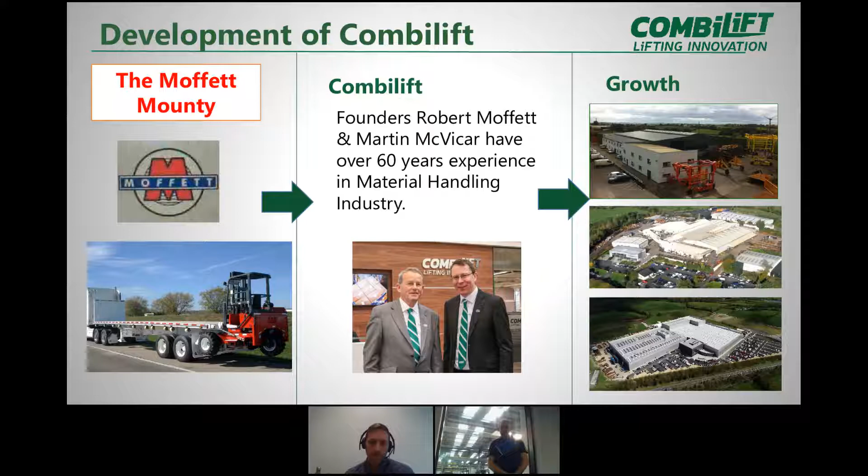So we're a worldwide business - I say we started in 1998. Employees, I said 650 there, but it's probably closer to that with a lot of growth this year especially, so we're probably up to about 800 employees now. In terms of turnover, we're exporting to a large number of countries - probably around 80 to 90 countries - and 98% of what we manufacture here is exported. Unfortunately Ireland only accounts for a small amount of business, so it's very much an international-based business. There's a huge investment into R&D - about 7% of turnover goes back into R&D, because we're manufacturing such a large range of products and always trying to update them and come up with new ideas. Maybe Anthony, if you want to show the first video.

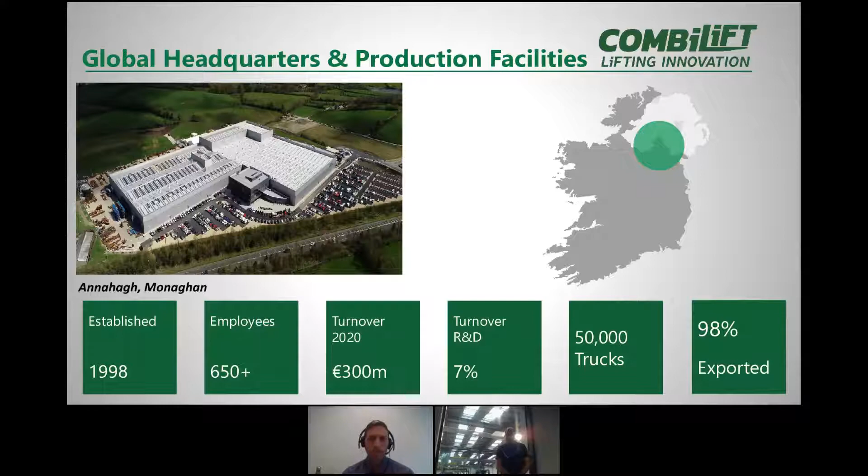Sorry, probably a bit delayed coming back there. So from that video, you'll be able to see some of the production process through the factory - right from the weld, through the paint, the assembly, and then the final testing of the products. As I said earlier, we're exporting to over 85 markets, probably closer to 90 markets now around the world - right from Russia to China to parts of Africa. So it really is a global business.

One other aspect of the business is the innovation within the business, which Combilift has been renowned for over the years. You can see some of the awards we have won. A lot of them came from within the material handling industry, just for the innovation in the new products which we design and manufacture here in Ireland and export around the world.

We manufacture a very big range of products. It's not just forklifts, it's a complete material handling portfolio, right from the very smallest machine, a pedestrian walk-behind designed for lifting 850 kilos, right up to the straddle carriers we manufacture here, which can handle 100 tons and over.

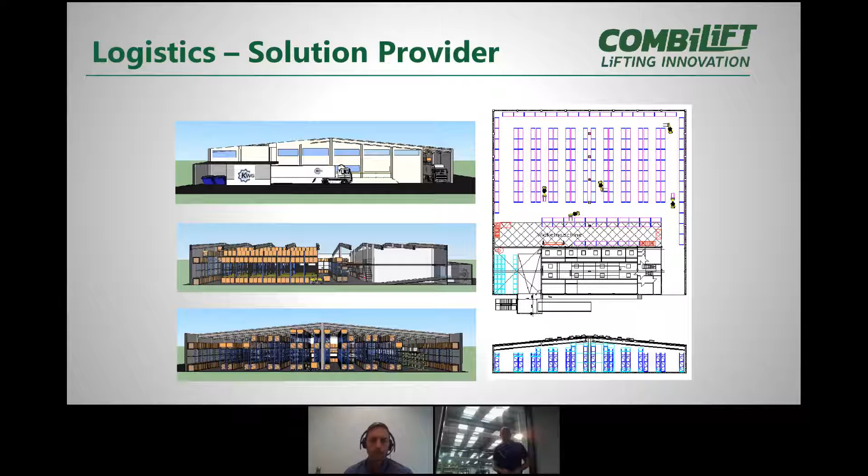We'll skip on, so I'll hand you over to Pauric Foy here now, and he's going to talk through some of the projects that he has worked on.

So I graduated in DKIT back in 2018, and I started working here in Combilift straight away after. I worked on a few projects in that time, but this is just one that we've done in the last 12 months or so, so I put a few slides together.

On the left-hand side there, that's our standard 4-directional C3000 truck, a 3-ton capacity 4-directional machine. We had a customer that actually had a couple of these trucks, but they wanted the same thing, only they wanted a side loader style truck, so the same sort of specification, but with a side loading cab.

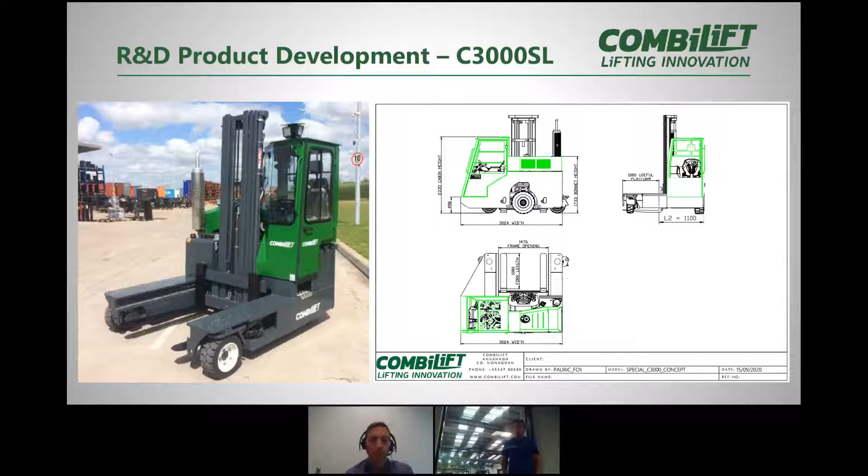You see on the right-hand side a layout drawing that we prepared for that machine. During the layout part of the process, we do a 2D drawing, which is much quicker than going into a detailed design. We can take that to the customer and say, is this sort of what you're thinking? And we can change some of the dimensions and specs until it's something we're all happy with. Let's see in the next slide.

So when we get something we're happy with, we go into the detailed design stage. That was drawn up using SolidWorks, so we're able to put everything together and see everything in 3D, how it's all going to fit together and work.

We try and use the standard parts as much as we can. The actual running gear, the engine, all the hydraulic components, the mast, everything like that is the same as a standard C3000. The only real difference is the cab and the panels, so that machine to service and work on is much the same as our standard C3000 truck. We'll go on to the next slide.

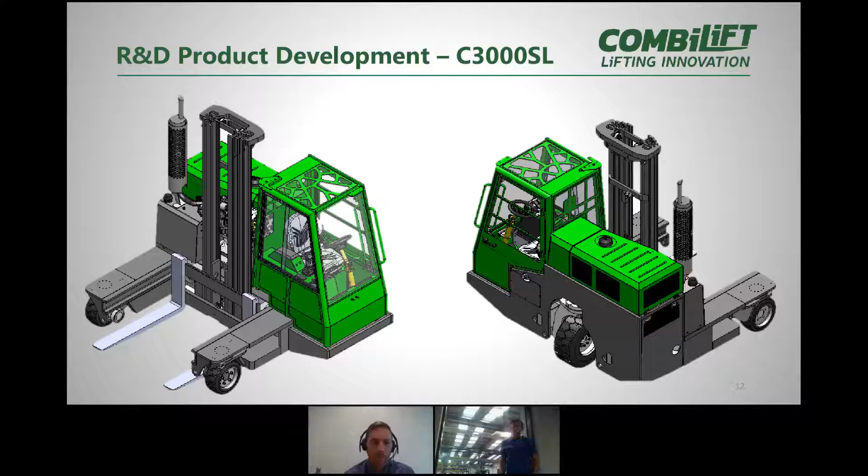As part of the engineering process, as a design engineer, we follow the project right through from welding right through to manufacture on the line here. On the left-hand side there, the machine just as the chassis was welded, and we fitted the cab on at that stage just to make sure everything was going to be okay, because it was an R&D project. On the right-hand picture, we have the machine actually on the line in production. So I would have followed that machine right through from weld through to production.

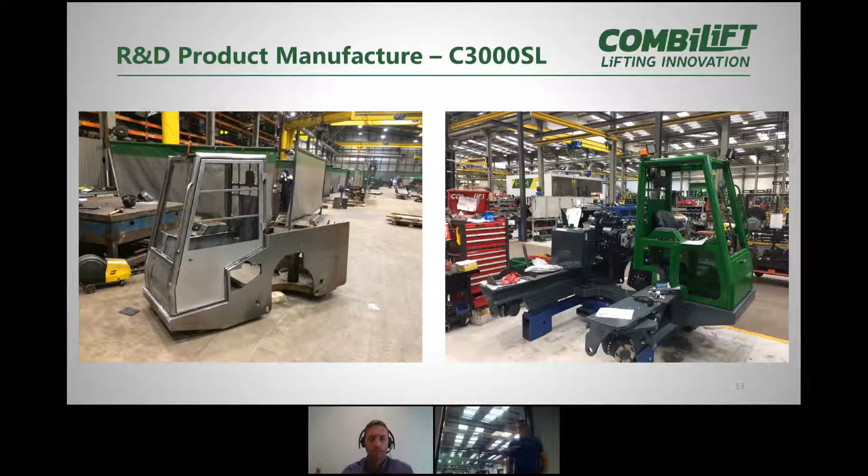So just the last slide on that project. That's the machine actually as it was built when complete. You see the photo on the left-hand side, the machine with a 3-ton weight on, so it would test the machine at maximum capacity, just to make sure everything was going to be okay. Every machine that leaves here does get a rigorous test before it leaves. Then we have a couple of photos on the right-hand side of the finished truck with the decals and all on, ready for the container.

So I'm going to hand it over to David Hatchett here, one of our control systems engineers, and he's going to talk through a few slides on that.

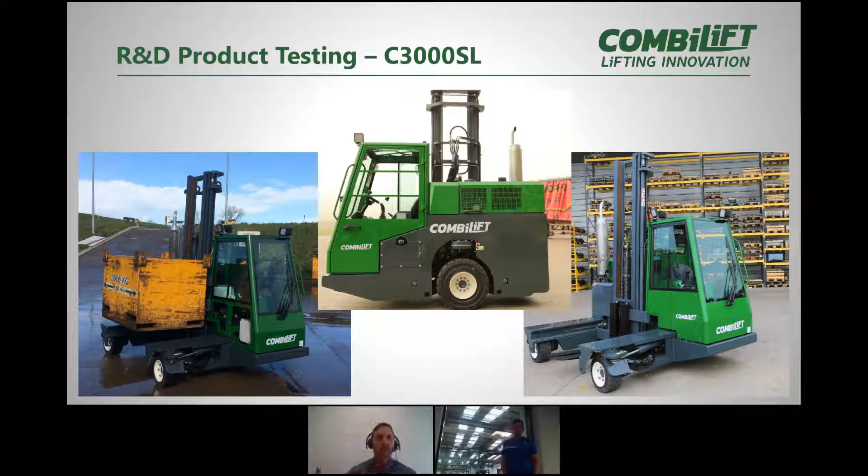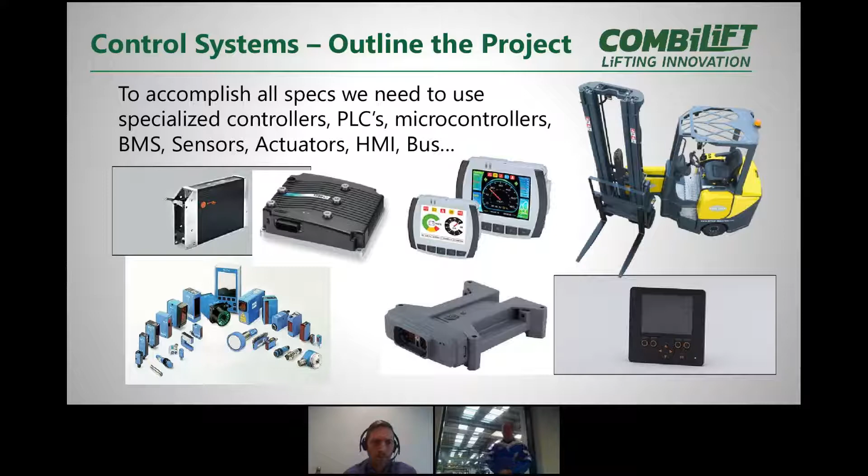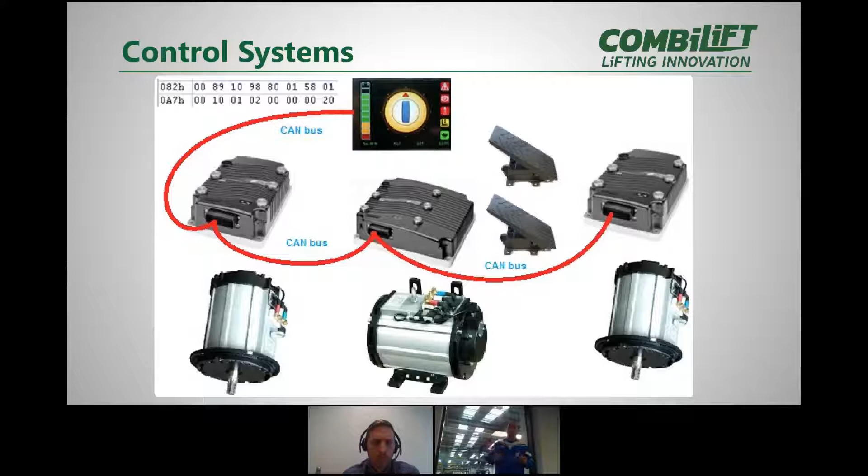Based on that, we would have all our components on our truck, and to have all them components, we'd have a nervous system. That'd be our CAN bus, to communicate with each component, so that every component can talk to each other and find out what unit or what motor was at, what part, what temperatures, and relay that all to the operator.

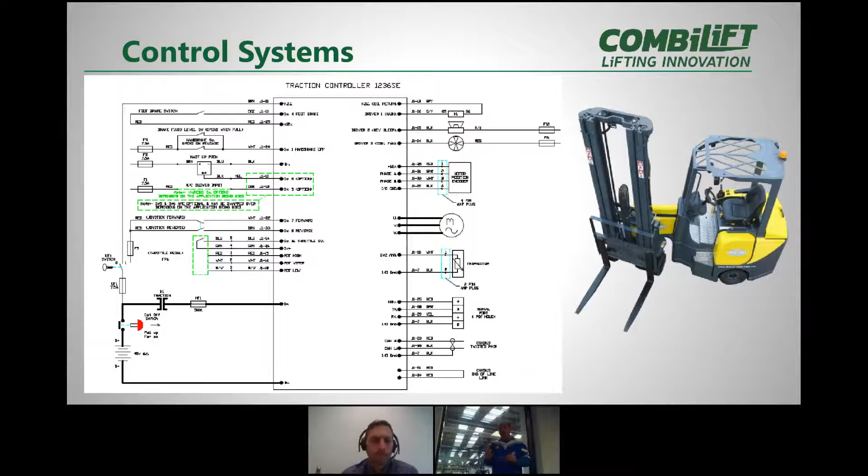Then what we do is we liaise with the electrical department and create a loom based on the outputs and inputs from them components that we're putting onto the truck, based on the functionality of the truck. So it's not just all hardware in the control systems department, we have software as well. We use many software packages to code and build in functionality in the truck.

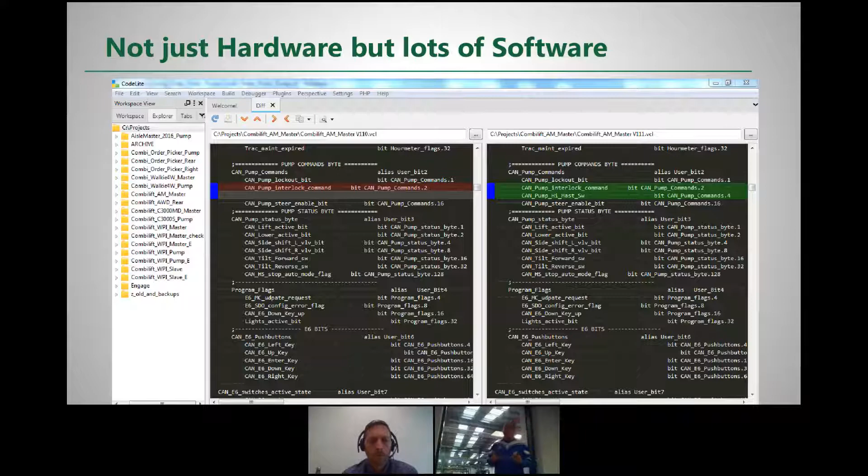So then that functionality, we can build in adjustments, parameters, and settings that the operator or the dealer can use to control speeds. That'll be another user interface that we build into the truck.

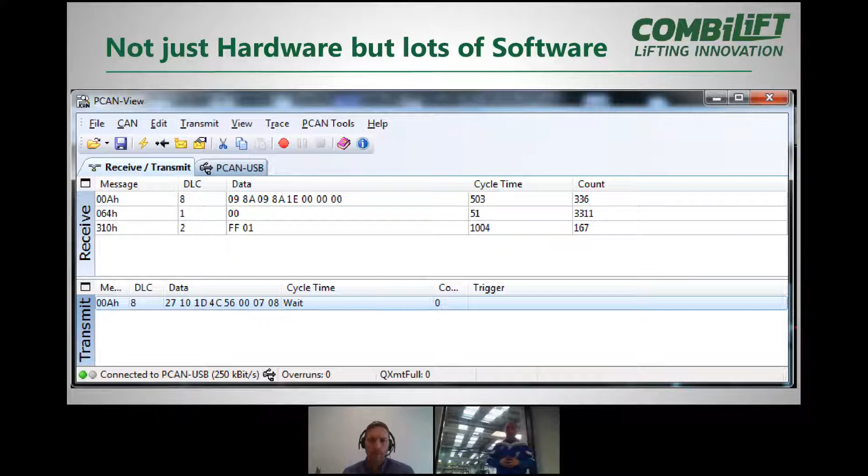Your career opportunities here would be to use this software to do advanced troubleshooting, like the oscilloscope, using the oscilloscope software, using the CAN bus software, as I said in the last slide. So that's why we need students to come on board.

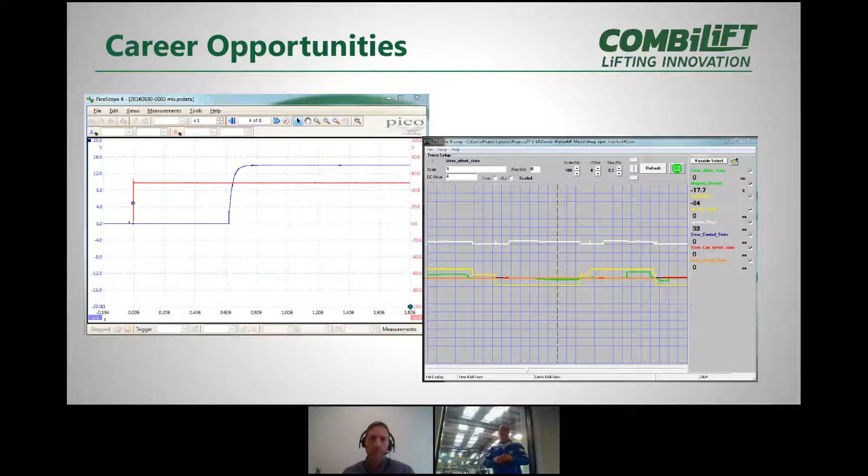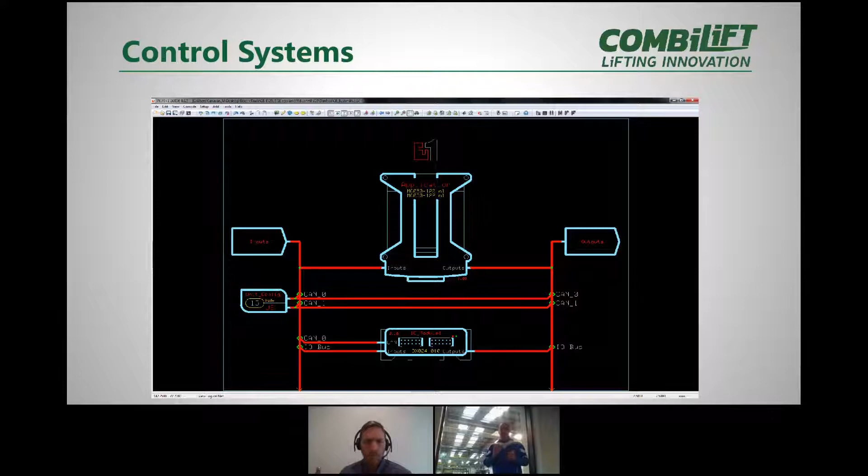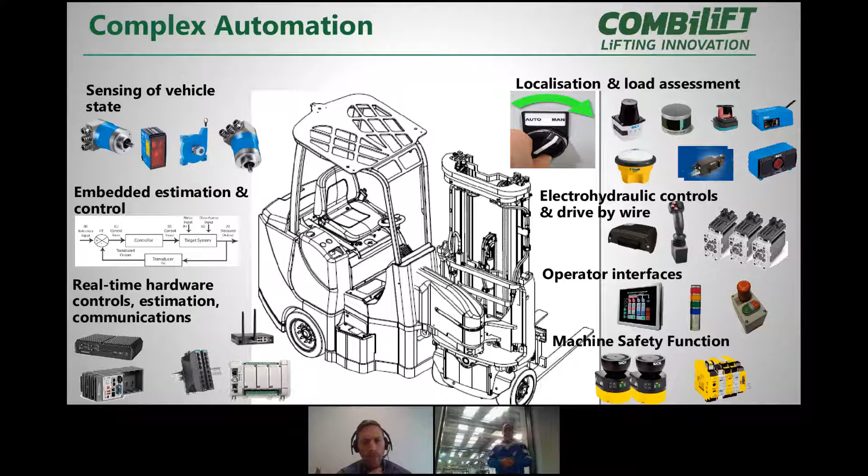So I'm going to talk about some of the career opportunities that we have available in Combilift. We do have placement and internship opportunities in business, so in marketing, HR, supply chain, operations, after sales, distribution, and accounts. Also in engineering, so mechanical, electronic, electrical, mechatronic, control systems, and software engineering.

So we are accepting applicants from graduate opportunities for all disciplines, and for project work, we take on final year projects, PhDs, ad hoc, and project work.

So how to stand out from the crowd. Ensure your CV is up to date, and your online personal profiles are updated, so your LinkedIn. No inappropriate content or actions on online profiles, so your social media platforms. Ensure your application is specific to the company and the role you're applying for.